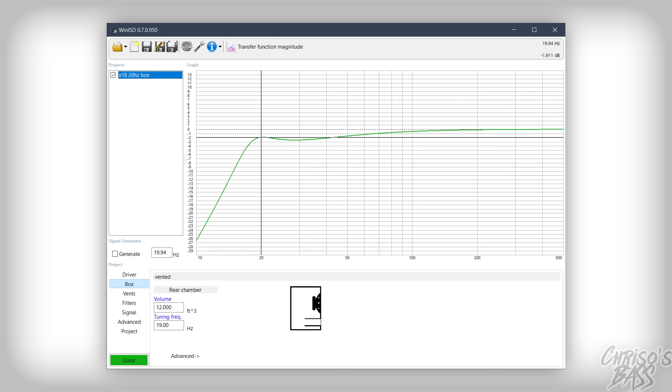The first thing you need to do is download WinISD, a free speaker box design program for Windows that is essential for this tutorial. I'll leave a link to this in the description. If you have a Mac, you might be able to get it to run using Wineskin, and if not, try to find another good program for subwoofer enclosure design.

When it comes to designing a ported subwoofer enclosure, there are two main important things that will determine how it plays: the net internal volume of the box and the port tuning, which is a combination of port length and physical area. Now, the general rules of thumb I've found is that for your subwoofer to play low, 1. The box needs to have a net internal volume that is around 1.33 times larger than the one in the company's recommended specs. 2. The box should be tuned to around 20 Hz.

You can adjust this according to which tuning frequency creates the nicest response for your liking, according to WinISD. These two rules are not definite and can be adjusted to your liking. They're simply just good rules to use when beginning to model in WinISD.

Once you've downloaded it, just open up the installer and go through the process of installing it. Open it up once it has installed and you'll be greeted by a blank graph with a few buttons up the top. Click on the speaker one labeled Driver Database, and this should bring up a new window where we can add our subwoofer and its T/S parameters.

Simply start by adding the brand name and model number of your subwoofer, then click over to the Parameters tab. Here, you'll want to get a list of TS parameters for your subwoofer up on the screen at the same time. Begin copying in each parameter from your list to the corresponding one in WinISD. Also, make sure that the measurement units in WinISD are the same as the ones in your list.

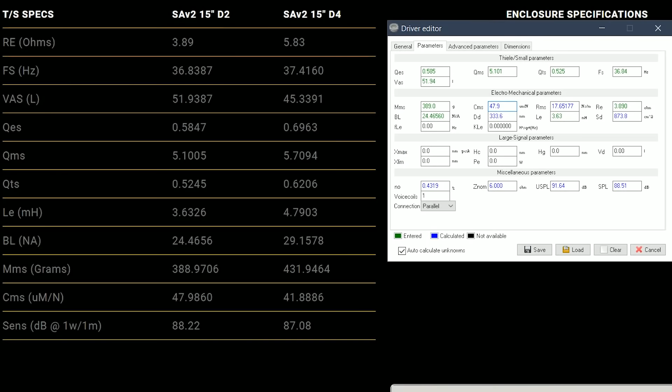If there are some that don't match up, simply cycle through each measurement unit in WinISD by clicking on it until you find one that you need. Try to fill in as many of the boxes as you can. It's okay if there are some left out, as your list of parameters won't come with every single one. Once you finish filling them in, you can now click Save and save the details for your driver to the folder.

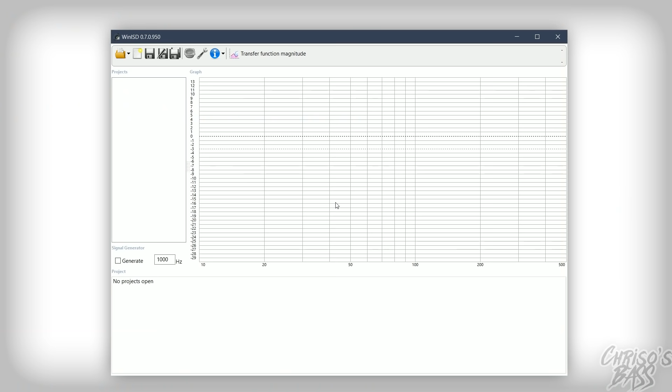Now click the little blank page icon up the top, which is second from the left, and then choose your driver. There'll be a huge list of pre-installed ones, so you'll just have to search through all of them until you find yours. Once you've selected it, hit next. Choose how many of them you'll be using in the box. In my case, it's just one.

Then hit next. Now change the type of design from closed to vented and then hit next again. Then select the Chebyshev as the alignment and once again hit next. Now just give the design a name. Once you've done that, you can hit next for a final time and boom, a graph should appear on the screen. Click on the little wrench up the top and then go to plot window and make sure your settings look the same as mine.

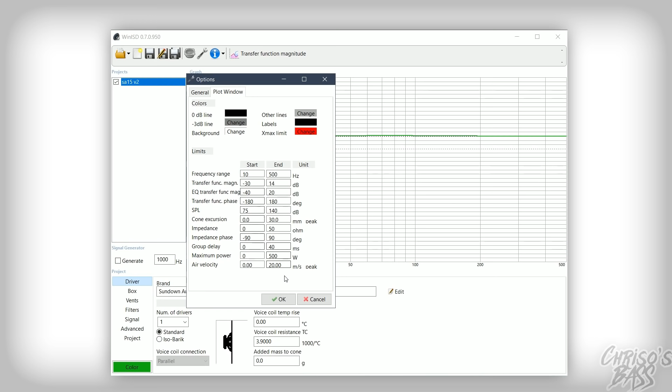Finally, we can start designing the box. Make sure the box tab is selected down the bottom. Once that's done, I recommend importing the subwoofer's recommended volume and tuning frequency, just to get an idea of how it models normally. From here on, you can tweak it to your liking and get your desired frequency response out of the box. Also, when using WinISD's transfer function magnitude graph, which is the one that's already selected, 0 decibels is a good place to be and is simply the most appropriate level of output for your subwoofer.

Higher than 0 decibels is great, and a little bit under it is also alright, but anything close to negative 10 decibels should not be the frequencies that you want to play. Negative 10 decibels in real life will be only half as loud as the 0 decibel region, because to the human ear, every time you add 10 decibels, it is perceived to be twice as loud as before.

Another very useful tip is that doubling the input power to a speaker generally increases output by 3 decibels. So let's say that on 500 watts I'm doing 130 decibels at 20 Hz and 133 decibels at 30 Hz. In order to make the sound pressure level or SPL at 20 Hz the same as the SPL at 30 Hz, I would have to push 1000 watts in 20 Hz instead of 500, which the sub may not take anyway. That's why it's important to design the box to play how you want it to play.

So now I'm going to take the internal volume and increase it by 1.33 times, which is 4 cubic feet, and I'm also going to tune it to 25 Hz. As you can see, this just boosted the output of the lows, which almost wasn't there at all originally. But I feel like we could still get way lower. To see if I can make the box bigger, I'm going to go down to the signal tab and enter how much power I'll be pushing to the sub. In this case, I'm just going to put 1000 watts since it's the RMS rating.

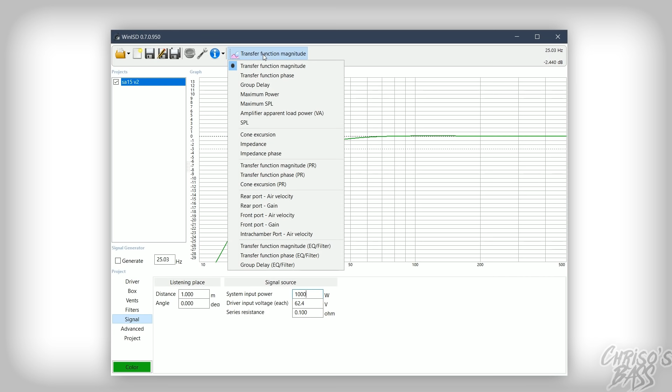From here, I'm going to go up to the top again and click the pink and blue graph icon. Change this to cone excursion. This will show the excursion of the sub in the box at 1000 watts at all frequencies. This red line indicates the sub's Xmax, so we should try and design a box that doesn't get too close to the red line. In this case, the sub hits Xmax at 20 Hz, so in the real world, I would just have to set the high pass filter on the amplifier to decrease the power around this area.

But overall, this box is looking very good and doesn't get close to the Xmax at all in the other frequencies. So I think we can get away with making it even bigger. I'm going to click back to the box tab and take a huge shot in the dark and make it 5 cubic feet. This is absolutely huge for an SA15 V2 and about 1.66 times bigger than recommended. I'm now going to tune it to 20 Hz and see what we get.

And boom, look at that. Only 4 decibels down at 20 Hz, meaning that 20 Hz would be completely audible and actually quite loud in the car. Let's check the excursion again by clicking on the button up the top. And wow, the sub only hits Xmax at 17 Hz now, so we would again just need to use a high pass filter on the amplifier. But I'm very impressed with this. An SA15 V2 playing down to 18 Hz with ease and then only just starting to drop off after.

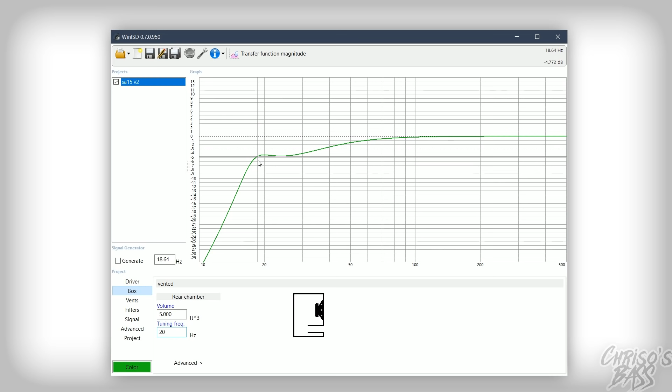Now, keep in mind that this box is not the most efficient at all and will not be anywhere near as loud with high notes as the recommended box. But if we compare it to the box that Sundown recommends, it plays impressively lower. So, since we've now worked out the box volume and port tuning, we now need to decide on the final factor, the optimal port area for the box.

Getting this right is important because if it's too small, you'll get a lot of unwanted port noise, and if it's too large, the subwoofer will have less cone control, which is where the average excursion increases and it bottoms out more easily. A good rule for port area in car audio is that for every cubic foot of your box's net volume, there should be 16 square inches of port area. This is not perfect, but it's a good place to start for calculating a port area that works for your box.

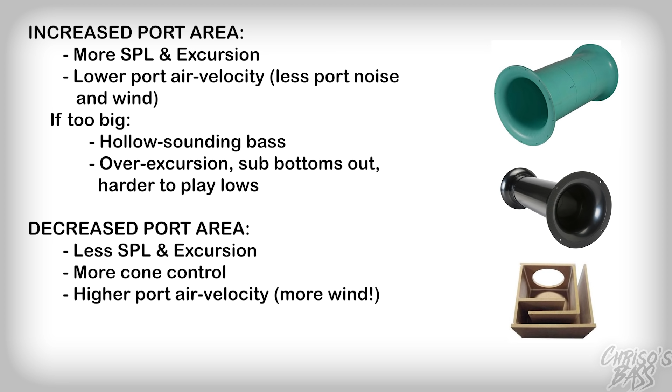The way that port area usually works is like this. As port area gets larger, the subwoofer's excursion and SPL increase, and port noise and wind or air velocity decrease. As port area decreases, the subwoofer's excursion and SPL also decrease slightly, but the amount of wind it makes or the port's air velocity increases a lot. However, keep in mind that making port area too big or small can bring about unwanted effects. For example, making it too big will bring about unwanted hollow sounding bass and allow the sub to hit Xmax more easily, therefore making it harder to play low due to overexcursion.

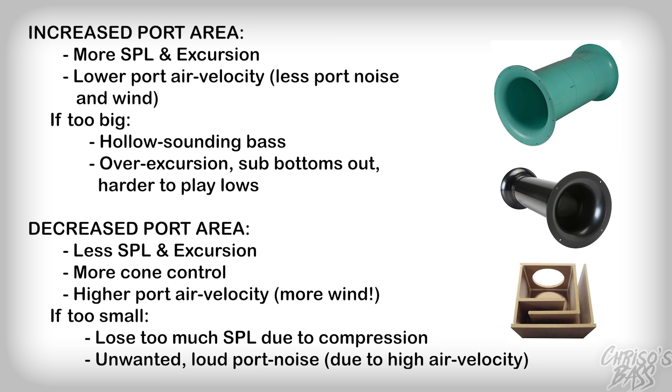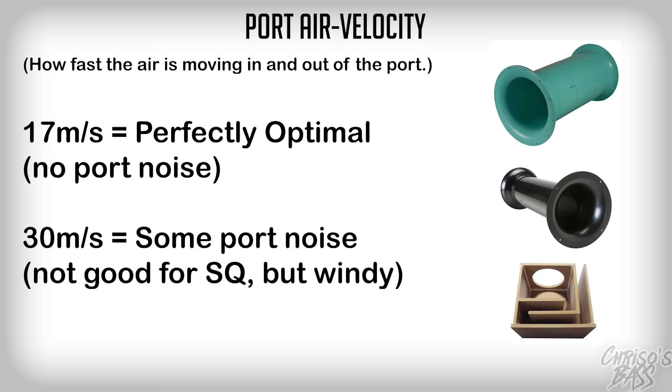If you make the port area too small, you'll lose significant SPL and hear a lot of port chuffing due to compression. In WinISD, you'll be able to check the port velocity, and from there we'll be able to modify it to whatever works best for your sub. A port air velocity of 17 meters a second is perfectly optimal. You won't hear any port chuffing at this speed and it should sound good. Realistically, you can have up to 30 meters a second, but you may hear a bit of port chuffing at this velocity.

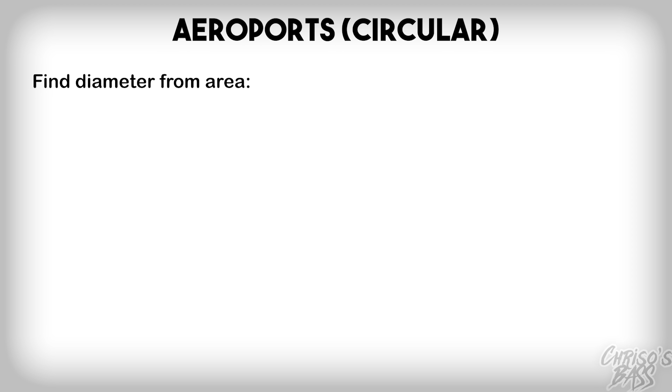So, since my box's net volume is going to be 5 cubic feet, I'm going to multiply 5 by 16 to get a rough estimate of the port area, which is 80 square inches. For some boxes, this will work great, but you'll probably have to modify it just a little bit. I'll break this part of the video into two parts, slot ports and aero ports. To find the diameter for your aero port, divide your port area by pi, then square root it, and then multiply it by 2. This will give you the perfect diameter for your aero port in inches.

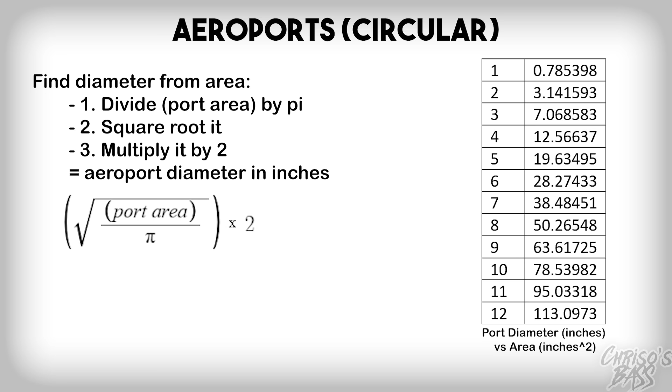Of course, aero ports only come in so many sizes, so you'll have to pick whatever is closest to this diameter when buying one. Keep in mind that the port area will change greatly when you change the diameter of the aero port. An aero port with a diameter of 4 inches gives you an area of 12.57 square inches, but an aero port with a diameter of 6 inches gives you an area of 28.27 square inches, over twice as much. I'll put a table on the screen of the areas of different aero port sizes to make it easy for you to choose what size you need. Let's say you wanted 100 square inches of port area. You could either go with one 11-inch aero port, two 8s, or five 5s. It's just whatever works best for you.

I'll also mention real quick that aero ports are more efficient than slot ports due to their circular shape. You generally won't need as much port area when using aero ports instead of slot ports. Another big bonus of using aero ports is that if you install multiple, you can plug one to change the tuning of your box temporarily.

Now onto slot ports. Deciding the dimensions for this can be done however you want, but I like to build my boxes with the port extending from the bottom of the front baffle to the top. So for this sub, since it's 15 inches in diameter, I'm going to make the front baffle of the box 16 inches tall. Therefore, since the port will go from the top of the front baffle to the bottom, it will also be 16 inches tall.

To figure out how wide it'll be initially, I'm going to divide the total port area by the height to get the width. 80 divided by 16 is 5, so the port will be 5 inches wide. We can adjust this width later in WinISD to get a good port area that works well. Now that I've explained slot ports and aero ports, we can go back into WinISD. Head over to the Vents tab and enter the dimensions for your port. It will start off being circular, but if you click on it, it will turn into a rectangular port.

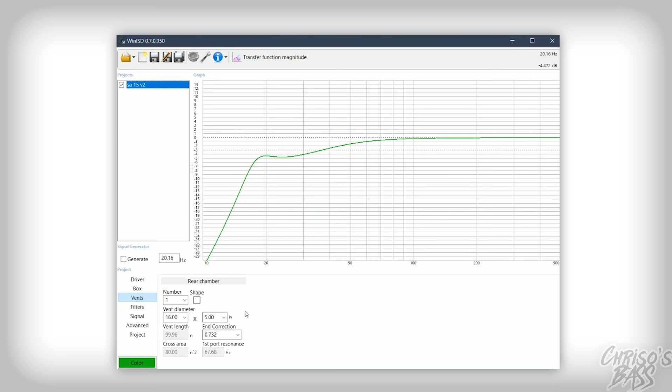My port dimensions are now in the program, so I can go up to the top to the pink graph again, and this time change it to rear port air velocity. If I click on the graph, I can see that my air velocity only ever reaches around 14 meters a second, which is completely fine and entirely inaudible. Because it's so low, I'm actually going to shrink the port width a little bit to make the overall box a bit smaller and get some more wind out of it. So I'll make the width 4 inches instead of 5.

And as you can see, that took the top air velocity up to 17.5 meters a second, which is completely optimal still. Let's try a width of 3.5. And it's about 20 meters a second. This is fine for me, as a tiny bit of port noise doesn't bother me at all, and the box should be putting out a decent amount of wind with this velocity.

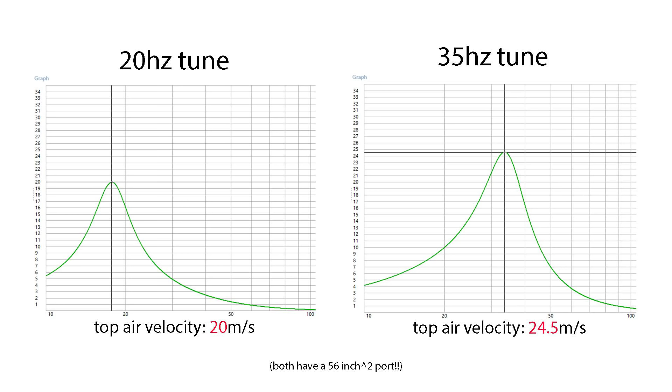Keep in mind that lower tuned boxes require much less port area than higher tuned ones. This is my current box with the 16 by 3.5 inch port tuned to 20 Hz and then tuned to 35 Hz. The 20 Hz tune has a max velocity of 20 meters a second, while the 35 Hz tune reaches 24.5 meters a second, so it would need a bigger port area.

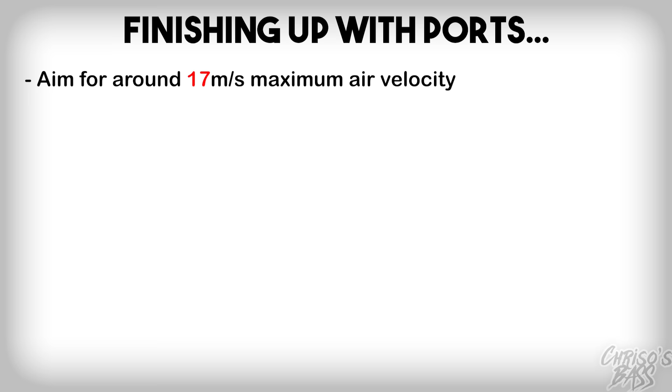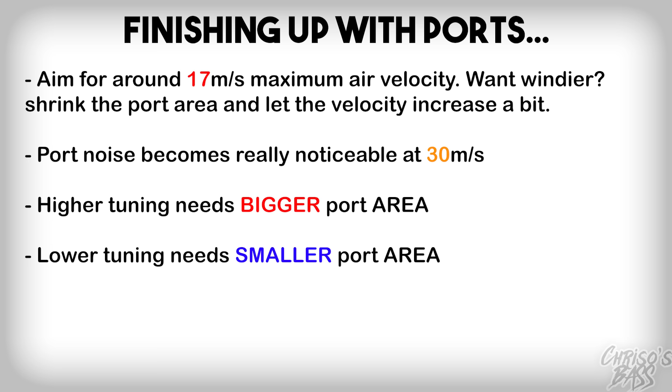And that just about covers designing an optimal port. To sum up, just aim for around 17 meters a second. If you want more wind, shrink the port and get the velocity a bit higher. But port noise won't become a serious issue until around 30 meters a second usually. Higher tuning needs bigger ports, lower tuning needs smaller ports, and that's about it.

The final part of this video will be about designing the real world box, the dimensions for each piece of wood and how they will all go together. If you already know how to do this or you have your own way of doing it, I recommend just skipping this part of the video. There are a few ways to do this: pen, paper, and a calculator, or using design software.

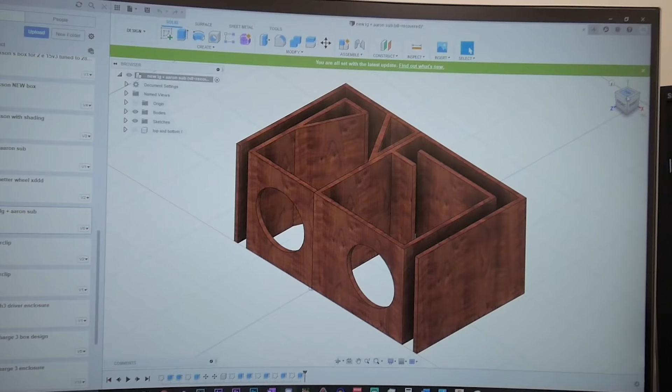I usually design my boxes with the 3D modeling program called Fusion 360, but for this video I'll be using a free website called Subbox Pro. I've found this website to be very good and generally very accurate when designing boxes, but there are a few things to be careful of. Head over to subbox.pro. I'll have the link in the description below.

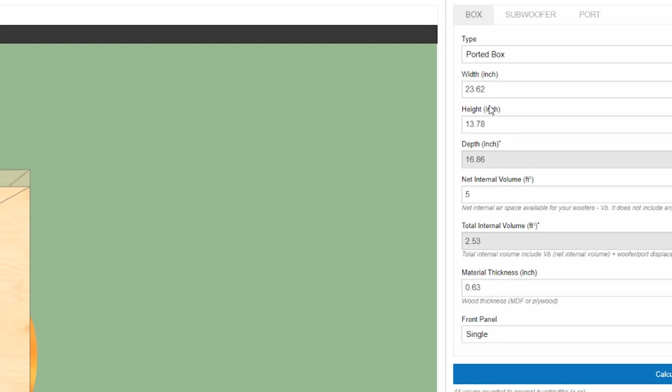Once the page is loaded, go down to where it says net internal volume and change the value from 2.3 to whatever your box's internal volume is. Then go down to material thickness and enter the thickness of the wood you'll be using to build it. I'll enter 0.71 inches because I build boxes out of 18mm MDF board. Now go to the subwoofer tab and change the size from 12 inches to whatever you're using. If you're using multiple subs, change the quantity from one to something else.

Now enter your sub's baffle cutout diameter in inches, and then the mounting depth, and then finally the woofer displacement. Once you've done this, go to the port tab and change the type from pipe right panel to whatever you need. For this tutorial, I'll be using the slot front panel. Now I can enter my tuning frequency, which is 20 Hz, and my port area, which is 56 inches squared.

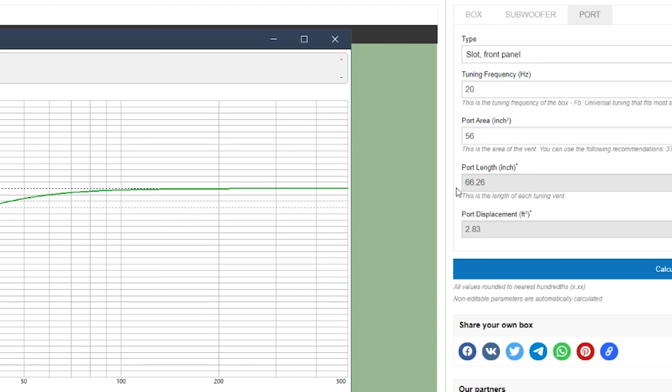Here's an important part that you don't want to miss. Make sure the port length in Subbox Pro matches up with the port length in WinISD. Go to the Vents tab in WinISD and get your recommended port length from there. If the length in Subbox Pro is wrong and doesn't match up, then lower the tuning slightly to make it longer, or make the tuning higher to make it shorter. This is only necessary because Subbox Pro doesn't have the most accurate calculations for port length.

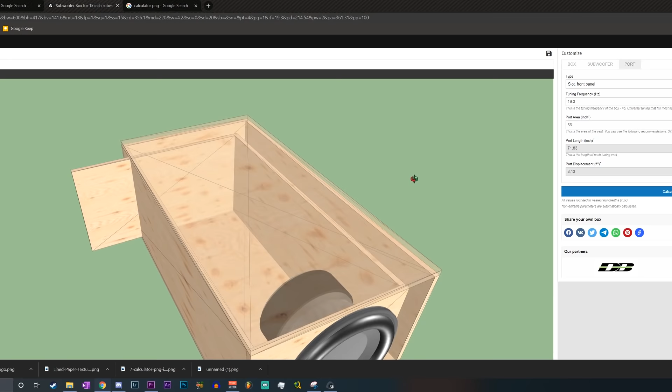If you click on the display of the boxes and drag your mouse around, you'll be able to see what the box is looking like. The port will probably be going outside of the box, but don't worry, we'll fix that. Once the port length in Subbox Pro matches up with the one in WinISD, you can go back to the box tab and adjust the width and height of the box to your liking. I'm going to make the height 17.42 inches and the width 35 inches.

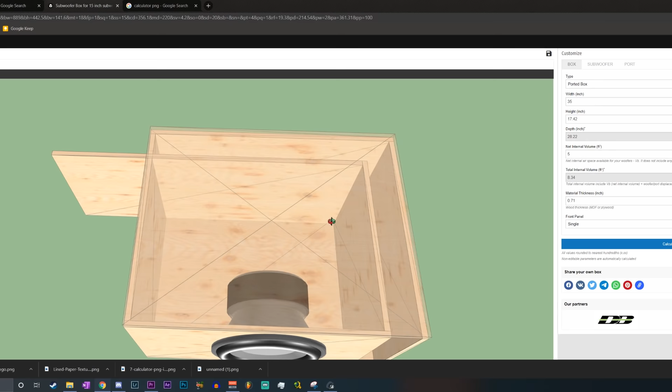And here I've run into a slight issue. If your box is tuned higher than 20 Hz, you most likely won't run into this issue, but as you can see, my port doesn't fit inside the box when it's arranged like this. Subbox Pro doesn't have the ability to design a port that will always fit, so I have to take what I have here and either use 3D modeling software or just pen and paper to do the rest.

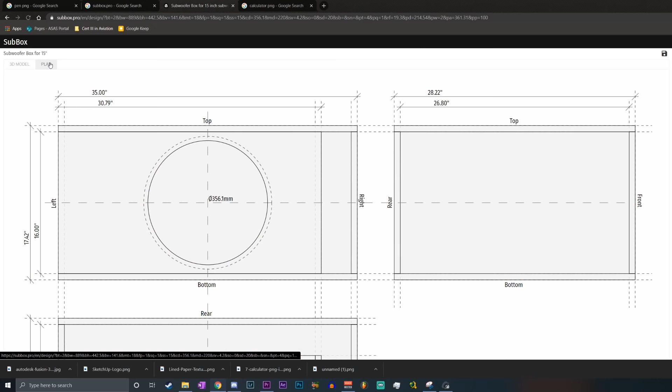If your port fits inside the box and has enough clearance at the end of it (the clearance must be equal to the port width or longer, by the way, so in my case 3.5 inches), then you can simply go to the top left corner and click plan, which will give you the blueprints to build your sub with, and you can finish watching here. If your port is going outside of the box like mine, follow these next few steps.

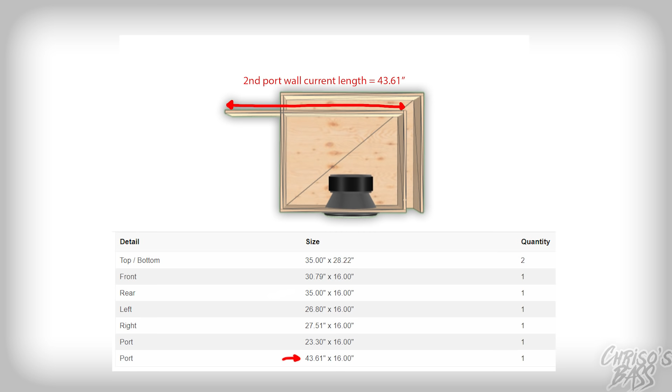So before I start this part of the video, I want to mention that modifying the box to get the port to fit inside it will result in a port that is 1 to 2 inches longer, therefore lowering the tuning only a tiny bit. As you can see, the second port wall in my box must be 43.61 inches long. The longest it can be without being too long is from the left side of the first wall to 3.5 inches away from the left baffle, as that's the port width.

So with this logic, I'll need 3 port walls instead of 2 to fit the entire port inside of the box. To figure out the length of the second one, I'll start with the internal length of the box, which is 33.58 inches. I'll subtract the port width from the right side, which is 3.5 inches, and then the width of the first wall, which is 0.71 inches, and then finally the required clearance area for the port width on the left baffle.

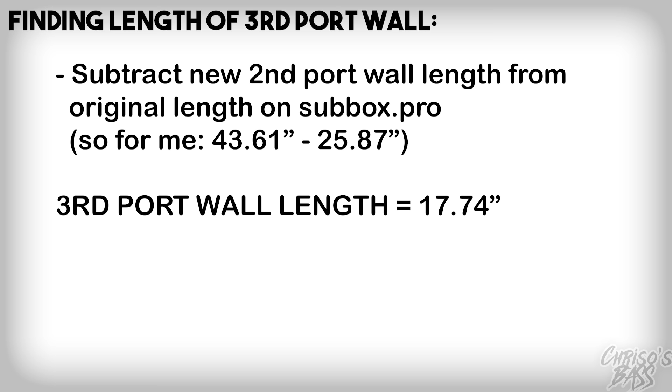Subtracting all of those values leaves me with the measurement for the second wall, which has a length of 25.87 inches. To find the length of the third port wall, we'll subtract the new second wall length, which is 25.87 inches, from the original second wall length, which was 43.61 inches. This gives a measurement of 17.74 inches. So now we have all 3 walls calculated. The first one is 23.3 inches long, the second one is 25.87 inches long, and the third one is 17.74 inches long. The final design will look something like this, which I'll show you how to make pretty soon.

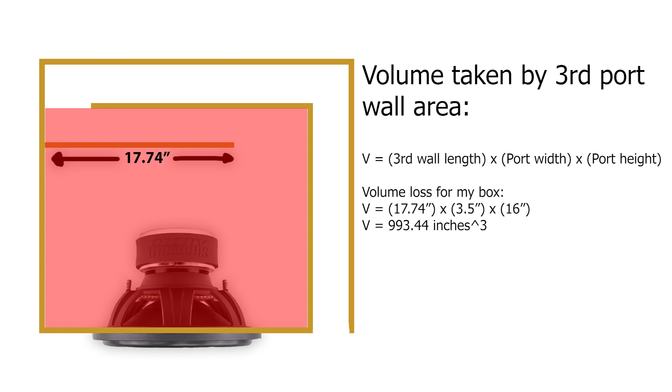To figure out the internal volume that we'll be losing by doing this, we just need to figure out the volume of the third wall area and then subtract it from the original 5 cubic feet. So the length is 17.74 inches and the width and height are the same as the rest of the port dimensions from WinISD, so a width of 3.5 inches and a height of 16 inches. If we multiply these 3 values together, we get our volume in cubic inches. For my box, I'm losing 993.44 cubic inches. Convert this to cubic feet and I get 0.57 cubic feet. So instead of my box's internal volume being 5 cubic feet, it'll be 4.43.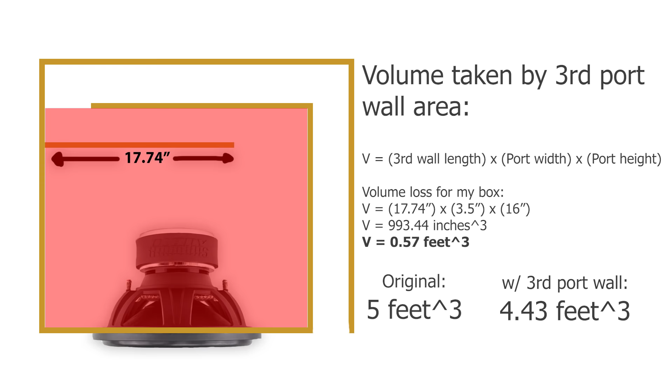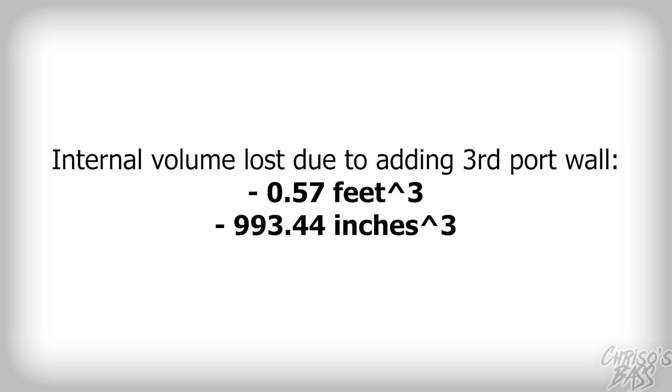There's a pretty simple method I came up with to help fix this loss of volume that consists of extending the depth of your box forwards to try and gain back lost volume, while also modifying the length of the whole port so the opening is still parallel with the front baffle. So, since I lost 0.57 cubic feet, or even better, 993.44 cubic inches, that's what I need to gain back in volume by extending the front baffle further forwards.

To find the depth of this extra volume, I'm going to take the volume I need to gain back in cubic inches and divide it by the internal length of the box. Then divide the new value by the internal height of the box, which is 16 inches. Now you'll be left with how much deeper you need to make your box. For me, it's 1.85 inches. Doing this will get the internal volume back to exactly 5 cubic feet.

But now, the port coming around on the right side of the box won't be parallel with the front baffle, so let's just extend it forwards by the same amount that we had to extend the rest of the box, which again is 1.85 inches for me. This slight port extension will only lower my tuning by 0.23 Hz, which doesn't matter at all. Yours will probably be the same.

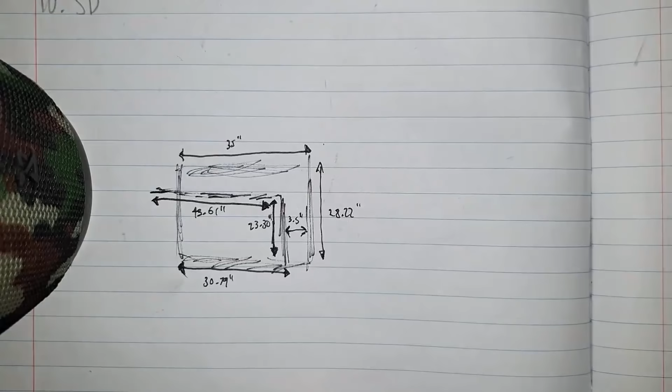Finally, we can design the very final version of the box. Using pen and paper will work just fine for this. I recommend starting by drawing a top-down view of the original untouched design straight from Subbox Pro, with the measurements for each piece of wood labelled on the drawing, so you can then use it as a reference to draw the final design. So this is my design right here. As you can see, I've just drawn the one that was in Subbox Pro with the exact same measurements.

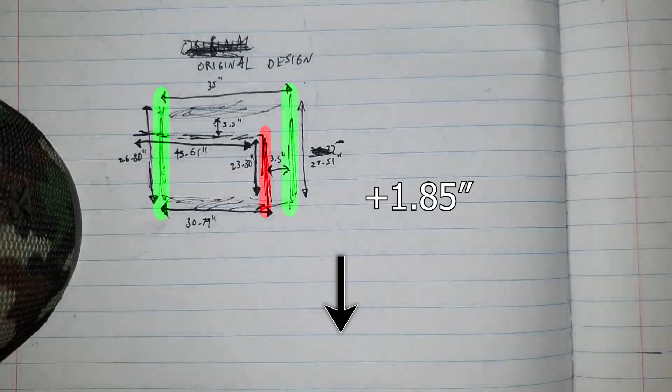For the new design, I'll add the depth extension to the box to gain back the lost volume and also add the third port wall. This will require making the left and right baffles, first port wall, and the top and bottom pieces all longer. So for my box, I need to add 1.85 inches to the depth of all of those pieces. You'll need to add whatever your value was. I'll just speed up this part of the video.

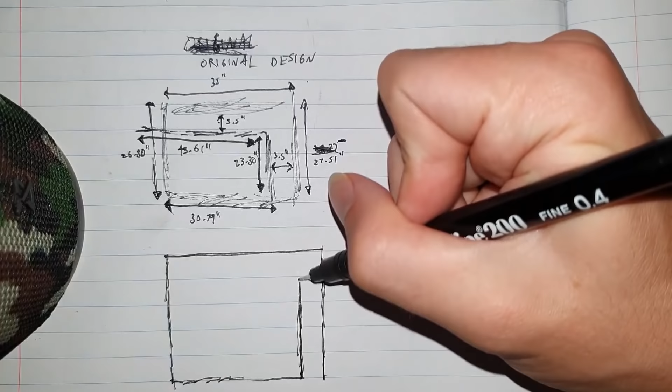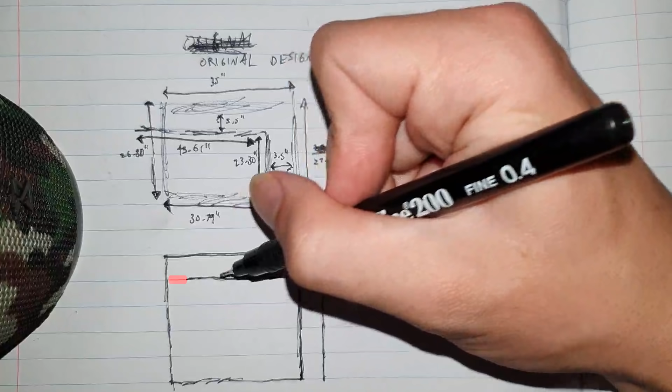Alright, so now that I've drawn the outside pieces for the new box, I can add in the new 3-wall port. At the top to the left of the first port wall, you'll want to add whatever your second port wall length was. So I'll add a 25.87 inch wall extending out from the left side. Now, there should be a 3.5 inch gap from the end of the second wall to the left baffle. I'm going to come down 3.5 inches and then add a third wall starting from the left baffle.

If done correctly, the port width should be the same from the first wall to the right baffle, from the second wall to the back baffle, and from the third wall to the second wall. And that's it. That's the first complete design of my box from a top-down view. All you need to do now is figure out the dimensions of each piece of wood for the box.

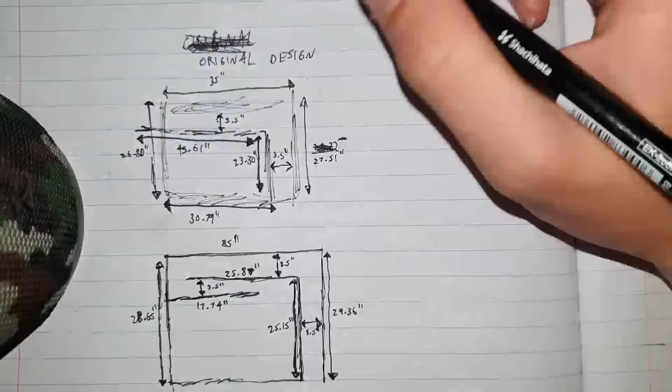You can do this by using the measurements from your final design and then using their original heights from the website, which for my box is 16 inches for every single piece of wood except for the top and bottom pieces, of course. So for example, my box's left baffle would be 28.65 inches by 16 inches. The right baffle would be 29.36 inches by 16 inches, and so on.

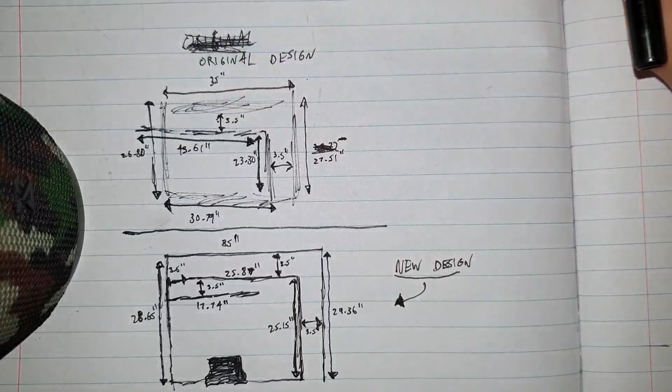Once you've determined the length and height for every single piece of wood, you can then start cutting out wood and building your box. In my box build video, you can see that I'm always referring to a piece of paper that shows the cutout dimensions for each piece of wood.

If you followed every step of the video correctly, you should have an awesome box that'll play exactly the way you designed it to. Keep in mind that cabin gain in cars does exist, so usually you'll experience a slight boost at a certain area of low frequency notes in particular when using the subwoofer box in a car compared to a house.